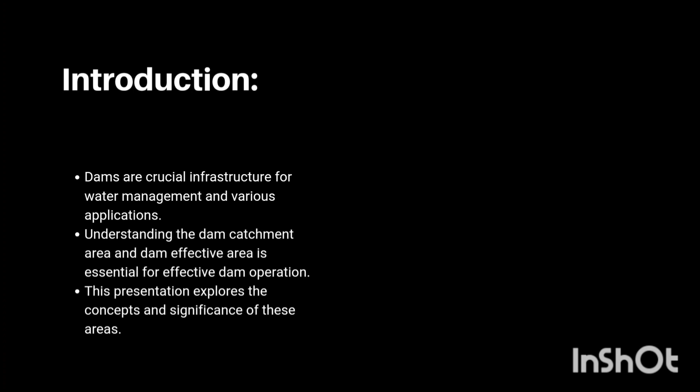Dam catchment area: the geographical area upstream of a dam that contributes water to the reservoir. Factors influencing the catchment area include topography, land features, and precipitation such as rainfall and snowmelt. The catchment area determines the potential inflow of water into the reservoir.

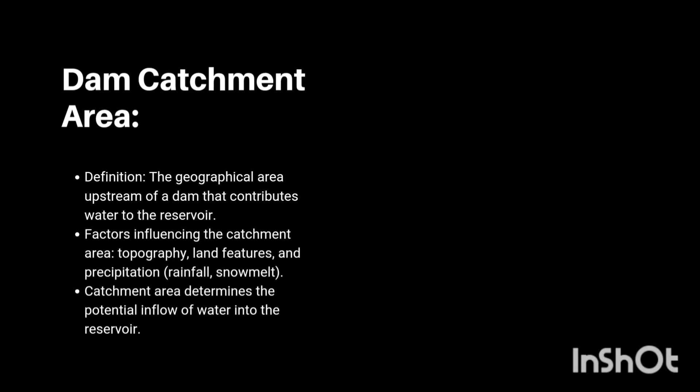Importance - water supply: the catchment area collects and stores water, ensuring a sustainable supply for various purposes. Inflow prediction: understanding the catchment area helps in estimating water inflow rates and managing water resources effectively. Quality control: monitoring the catchment area aids in assessing water quality and implementing necessary measures.

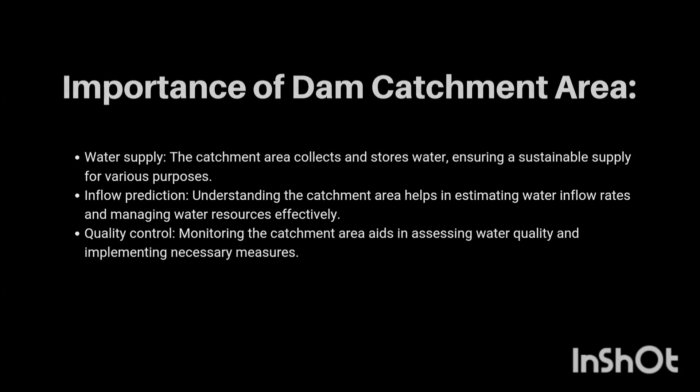Dam effective area. Definition: the surface area of water held behind the dam when the reservoir is at its full capacity, determined by the dam's design, capacity, and the elevation at which it is considered full. The effective area represents the storage capacity of the reservoir.

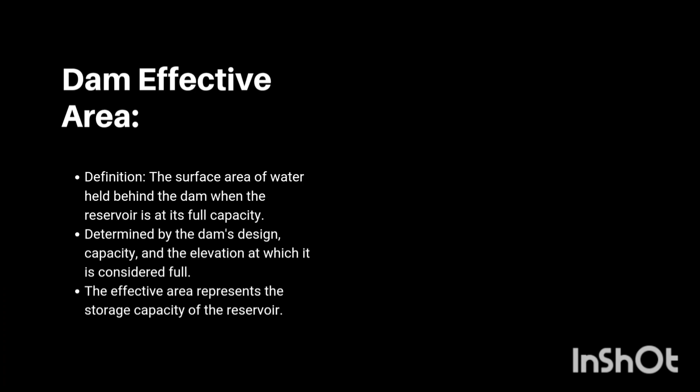Significance - water storage: the effective area determines the volume of water that can be stored for various purposes. Water allocation: it helps in planning water allocation for drinking water supply, irrigation, industrial use, and environmental needs. Hydropower generation: the effective area influences the potential energy generation capacity of a hydroelectric dam.

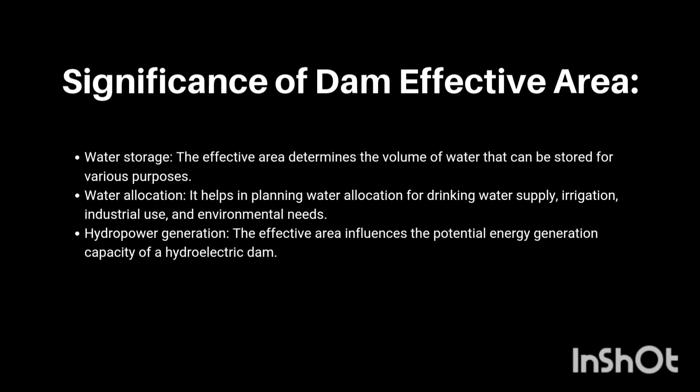Management considerations: sustainable water management, balancing water supply and demand based on catchment area and effective area. Flood control: the catchment area's contribution helps in predicting and managing potential flood events.

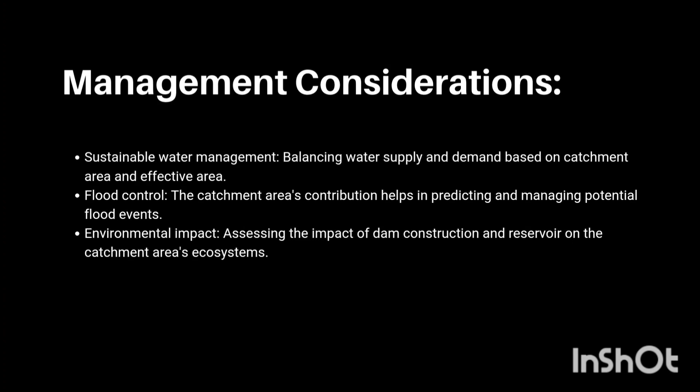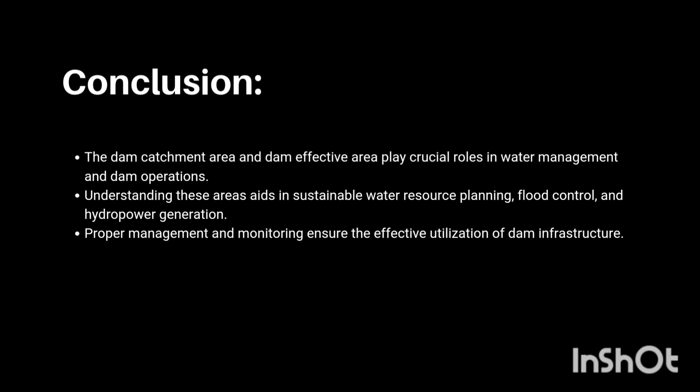Environmental impact: assessing the impact of dam construction and reservoir on the catchment area's ecosystems. In conclusion, the dam catchment area and dam effective area play crucial roles in water management and dam operations. Understanding these areas aids in sustainable water resource planning, flood control, and hydropower generation. Proper management and monitoring ensure the effective utilization of dam infrastructure.

Slide 1: Different types of pipes. Slide 2: Introduction. Pipes are essential components of various industries and applications. This presentation provides an overview of different types of pipes and their characteristics.

Slide 3: PVC pipes, Polyvinyl Chloride. These pipes are lightweight, durable, and cost-effective. Widely used in plumbing, irrigation, and drainage systems. Resistant to corrosion, chemicals, and UV radiation.

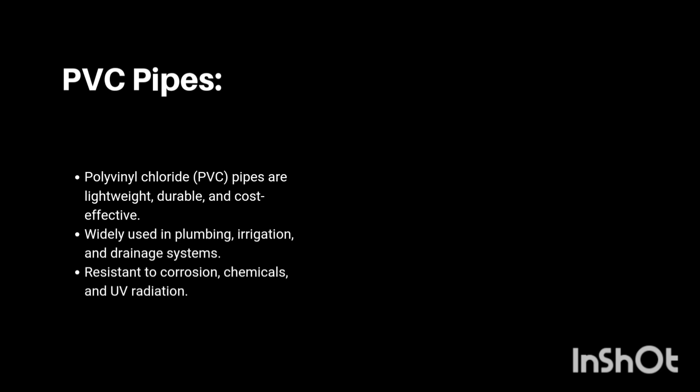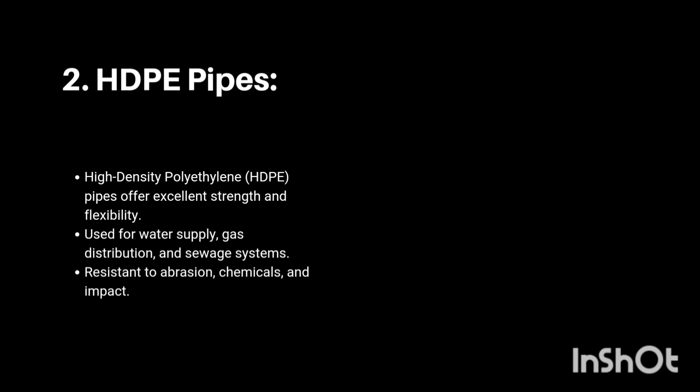Slide 4.2: HDPE pipes, High-Density Polyethylene. These pipes offer excellent strength and flexibility. Used for water supply, gas distribution, and sewage systems. Resistant to abrasion, chemicals, and impact.

Slide 5.3: Copper pipes. Copper pipes are known for their excellent heat and corrosion resistance. Commonly used in plumbing, HVAC systems, and refrigeration. Easy to install and long-lasting.

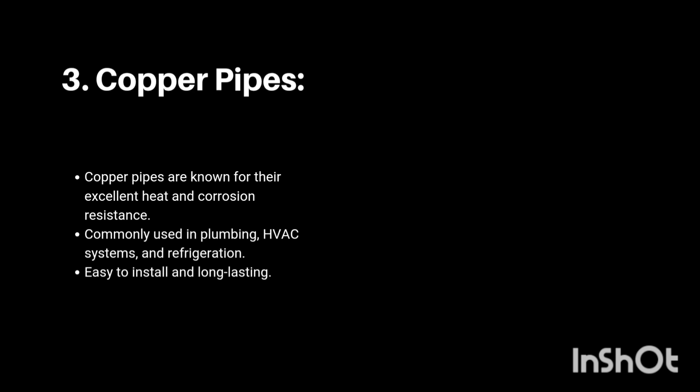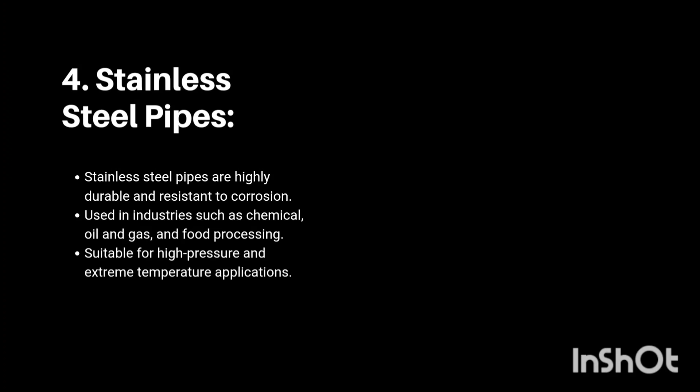Slide 6.4: Stainless steel pipes. Stainless steel pipes are highly durable and resistant to corrosion, used in industries such as chemical, oil and gas, and food processing. Suitable for high-pressure and extreme temperature applications.

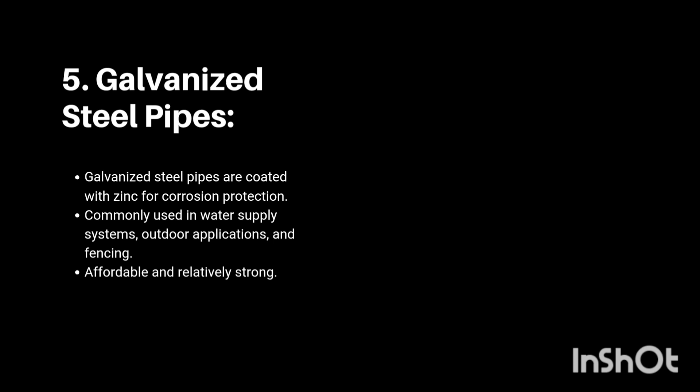Slide 7.5: Galvanized steel pipes. Galvanized steel pipes are coated with zinc for corrosion protection, commonly used in water supply systems, outdoor applications, and fencing. Affordable and relatively strong.

Slide 8.6: PEX pipes, Cross-Linked Polyethylene. These pipes offer flexibility and ease of installation, used in plumbing and radiant heating systems, resistant to corrosion and freeze damage.

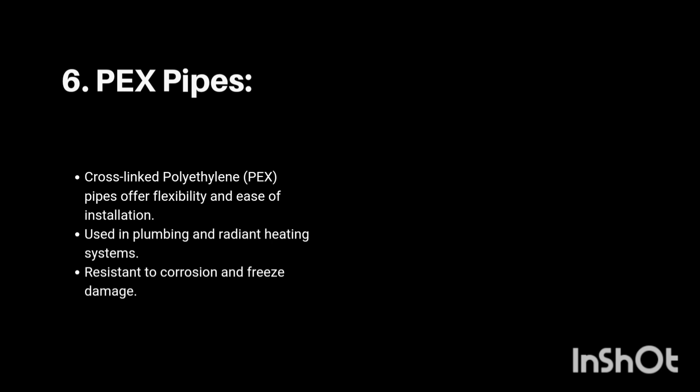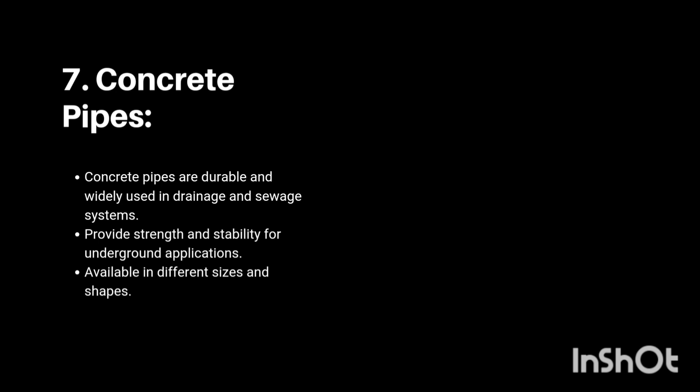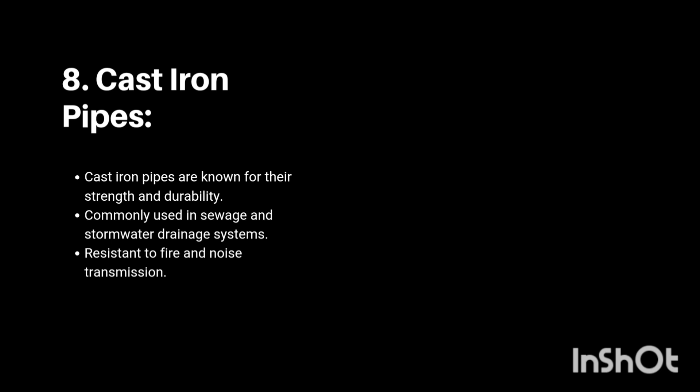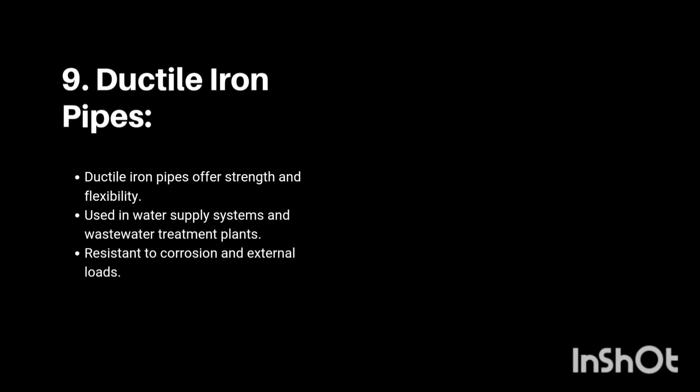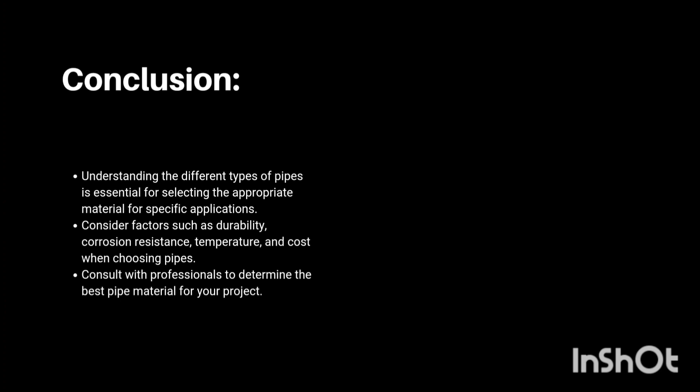Slide 12: Conclusion. Understanding the different types of pipes is essential for selecting the appropriate material for specific applications. Consider factors such as durability, corrosion resistance, temperature, and cost when choosing pipes. Consult with professionals to determine the best pipe material for your project.

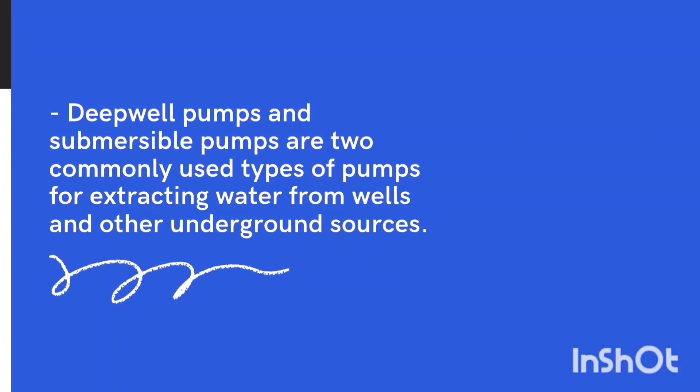Title: Comparison between deep well pumps and submersible pumps. Slide 1: Introduction. Deep well pumps and submersible pumps are two commonly used types of pumps for extracting water from wells and other underground sources. In this presentation, we will explore the key differences between deep well pumps and submersible pumps, highlighting their features, applications, and advantages.

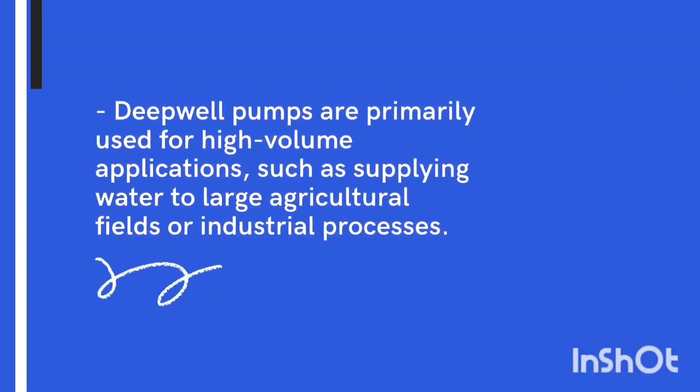Slide 2: Deep well pumps. Deep well pumps are designed to operate from deep wells or boreholes. They are typically installed above the ground, with a vertical shaft extending into the well. Deep well pumps are primarily used for high-volume applications, such as supplying water to large agricultural fields or industrial processes. These pumps are capable of lifting water from considerable depths, often exceeding 100 feet.

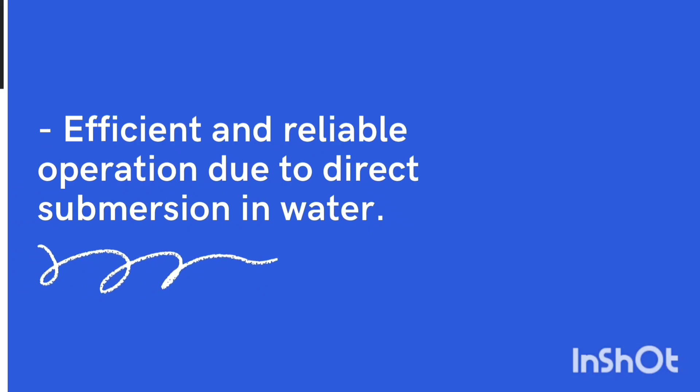Submersible pumps provide efficient and reliable operation due to direct submersion in water, with space-saving installation since no above-ground housing is required. They are ideal for shallow wells and residential applications.

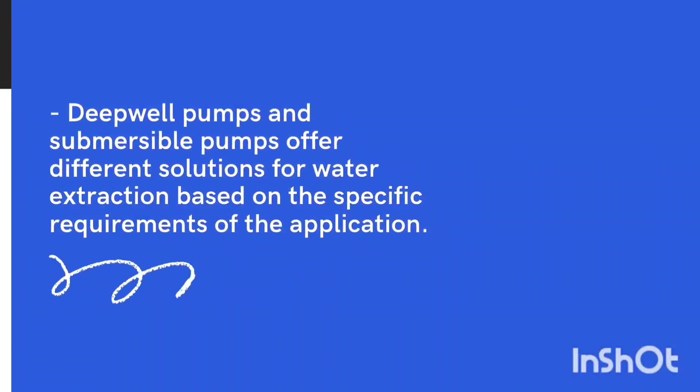Slide 8. Conclusion. Deep well pumps and submersible pumps offer different solutions for water extraction based on the specific requirements of the application. Deep well pumps excel in high volume and deep well scenarios, while submersible pumps are more suitable for shallow wells and residential applications.

Understanding the differences and advantages of each pump type allows for informed decision-making when choosing the appropriate solution for a given water extraction project. Slide 9.

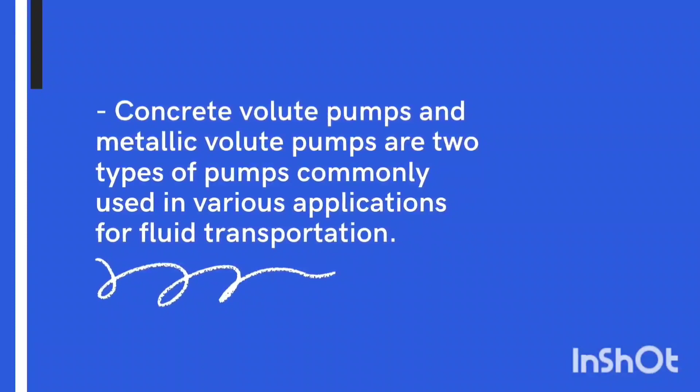Slide 1. Introduction. Concrete volute pumps and metallic volute pumps are two types of pumps commonly used in various applications for fluid transportation. In this presentation, we will compare and contrast the features, construction, and advantages of concrete volute pumps and metallic volute pumps.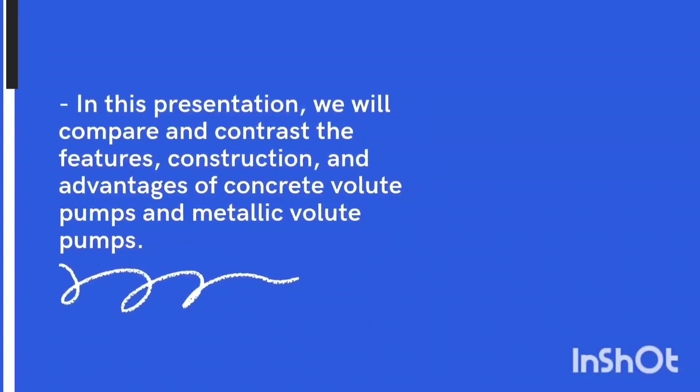Slide 2. Concrete volute pumps. Concrete volute pumps are made from a combination of steel reinforcement and cast-in-place concrete. The volute casing, impeller, and discharge elbow are constructed using concrete, providing high strength and durability. These pumps are commonly used in water treatment plants, flood control, irrigation, and large-scale industrial applications.

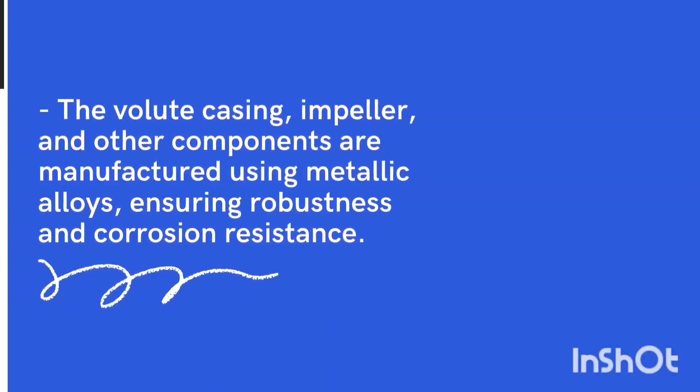Slide 3. Metallic volute pumps. Metallic volute pumps are typically made from materials such as cast iron, stainless steel, or other metals. The volute casing, impeller, and other components are manufactured using metallic alloys, ensuring robustness and corrosion resistance. Metallic volute pumps find application in commercial buildings, residential water supply systems, firefighting, and general fluid transfer processes.

Slide 4. Construction. Concrete volute pumps. The construction involves forming a spiral-shaped casing using molds, into which concrete is poured and reinforced with steel bars. The impeller is typically made of a metallic material, such as cast iron or stainless steel. The concrete casing provides structural integrity and helps minimize turbulence and hydraulic losses.

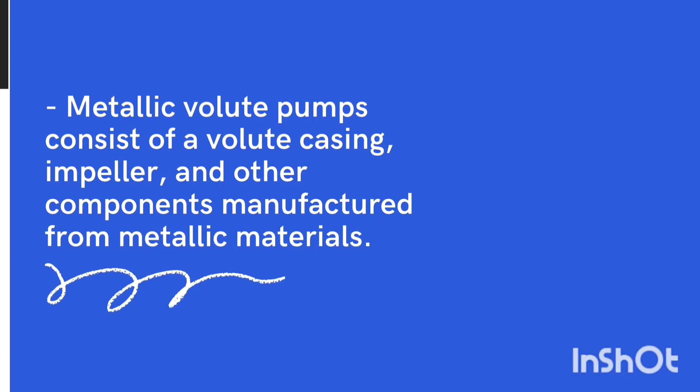Metallic volute pumps consist of a volute casing, impeller, and other components manufactured from metallic materials. The casing and impeller are precision machined or cast from materials such as cast iron, stainless steel, or bronze. Metallic construction ensures resistance to corrosion, erosion, and wear, making these pumps suitable for various fluid types and operating conditions.

Slide 5. Advantages of concrete volute pumps: high structural strength and durability due to reinforced concrete construction, excellent resistance to corrosive and abrasive fluids, lower manufacturing costs compared to metallic volute pumps, and can be custom designed and constructed for specific applications and flow rates.

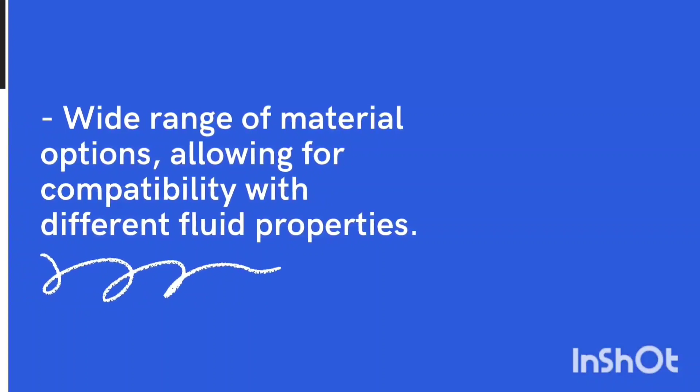Slide 6. Advantages of metallic volute pumps: a wide range of material options allowing compatibility with different fluid properties, superior corrosion resistance especially when dealing with aggressive or chemically active fluids, precise machining or casting ensuring hydraulic efficiency and optimized performance, and easier maintenance and repair due to standardized parts availability.

Slide 7. Limitations of concrete volute pumps: more difficult to modify or retrofit due to the permanent nature of the concrete construction, larger footprint and heavier weight compared to metallic volute pumps, and higher initial installation costs, especially for smaller scale applications.

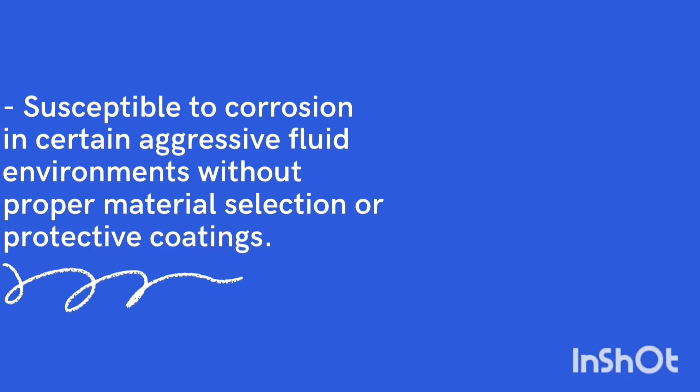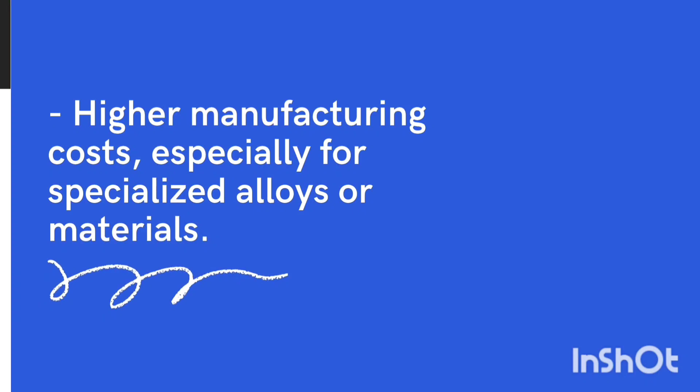Slide 8. Limitations of metallic volute pumps: susceptible to corrosion in certain aggressive fluid environments without proper material selection or protective coatings, may require more frequent maintenance and replacement of metallic components due to wear and tear, and higher manufacturing costs, especially for specialized alloys or materials.

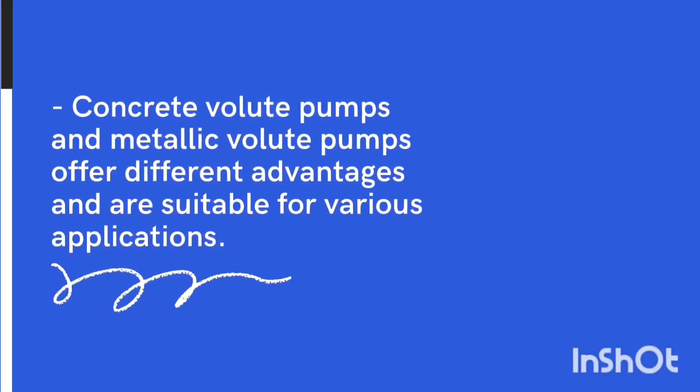Comparison between gravity and pressurized systems for water distribution.

Introduction. Gravity and pressurized systems are two commonly used methods for water distribution in plumbing and water supply networks. In this presentation, we will compare and contrast gravity systems and pressurized systems, examining their principles, components, and advantages.

Gravity system. A gravity system relies on the natural force of gravity to distribute water. It utilizes a higher elevation water source, such as a reservoir or water tower, to create pressure and allow water to flow to lower-lying areas. Gravity systems are commonly used in rural areas, where the topography facilitates the distribution of water by gravity.

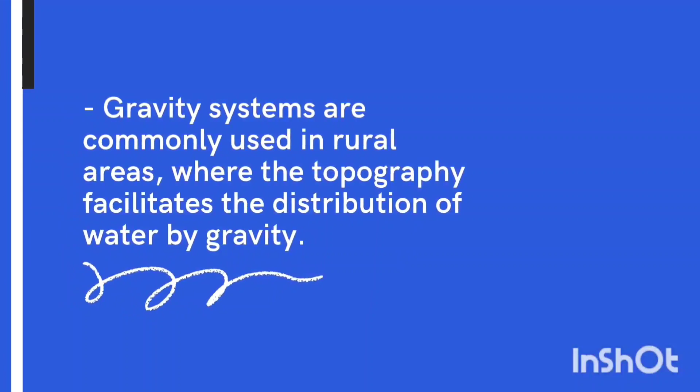Pressurized system. A pressurized system uses mechanical devices, such as pumps or pressure tanks, to generate and maintain water pressure. Water is pumped into the distribution network under pressure, allowing it to reach all areas of the system. Pressurized systems are prevalent in urban areas, buildings, and complex water supply networks.

Principle of operation. Gravity system: water flows downhill due to gravitational force, utilizing the potential energy of the higher elevation source. The height difference between the source and the distribution points determines the pressure and flow rate.

Pressurized system: water is pumped into the distribution network, creating pressure that forces water to flow through the pipes. Pressure is maintained by pumps or pressure tanks, ensuring consistent water supply to all areas of the system.

Components. Gravity system: water source, reservoir or water tower at a higher elevation; gravity pipes or channels to carry the water downward; distribution points at lower elevations to access the water.

Pressurized system: pumps or pressure tanks to generate and maintain pressure; pipes and valves to transport and control the flow of water; distribution points equipped with fixtures, such as faucets and outlets for water usage.

Advantages of gravity systems: reliance on natural forces, reducing energy consumption and operating costs; simplicity of design and operation, requiring minimal mechanical components; suitable for areas with favorable topography and sufficient elevation differences; lower maintenance requirements compared to pressurized systems.

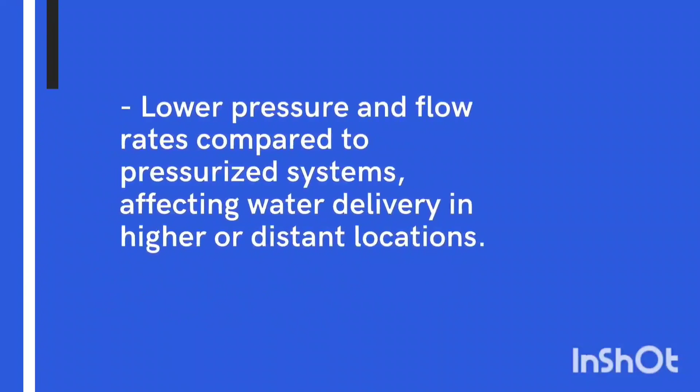Limitations of gravity systems: dependent on topography and elevation differences, limiting their applicability in certain areas; lower pressure and flow rates compared to pressurized systems, affecting water delivery in higher or distant locations; potential challenges in supplying water to elevated areas or multi-story buildings.

Limitations of pressurized systems: higher energy consumption due to the need for pumps or pressure tanks; increased complexity in design, installation, and maintenance; susceptibility to pump failures or power outages, leading to disruptions in water supply.

Conclusion: gravity systems and pressurized systems offer distinct advantages and considerations for water distribution. Gravity systems are cost-effective, energy-efficient, and suitable for areas with suitable topography. Pressurized systems provide flexibility, consistent pressure, and adaptability to various building types.

Sluice valve: controlling flow with precision.